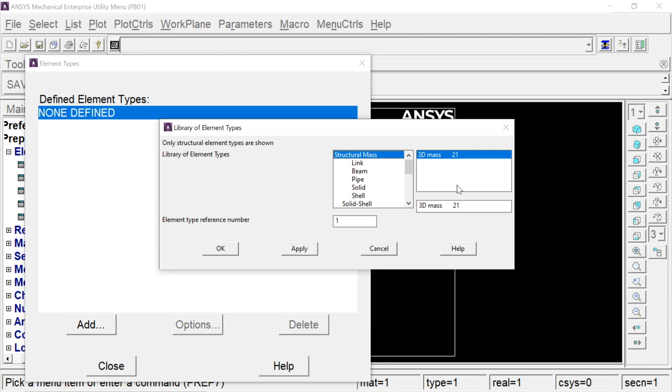So starting with preferences, this is also a structural problem. Then going to preprocessor, element type, add/edit/delete, add. We will take a link 180. Even though the properties of the element are changing, we will take only one element and we will change the properties. Don't add multiple elements unless it is necessary. You don't need a real constant.

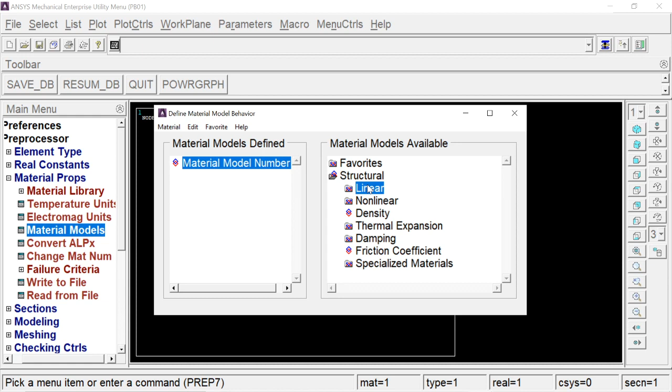We will go to material property, material models, structural, linear, elastic, isotropic, the normal steps which we do. We will just check the properties which we have. It's 2e5, so we will continue with that 2e5 and 0.3 Poisson's ratio. Even though it is not given, you can always put 0.3. Exit, because there is no change in material property, I will not go and add different materials.

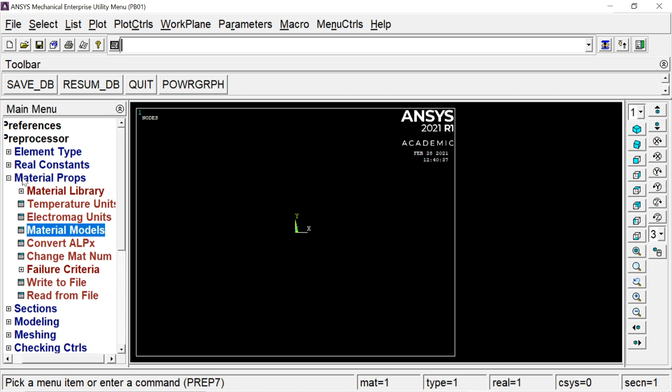Then we will go to sections, link, add. Now here you can see in the problem there are three different sections: one section at the start, a second section in the middle, and a third section. Link elements generally don't consider any shape, because it takes the axial load; it's the cross section area that matters, and here we need to find the cross section area. I have already found A1, A2 and A3. We will be inputting these cross section areas into our problem.

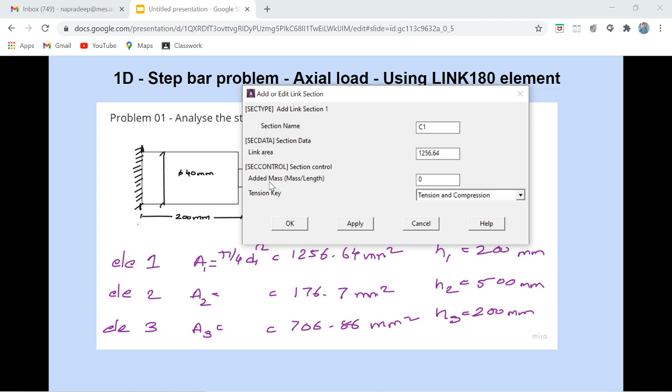So we will just go with ID 1, say okay, and section name, let's say C1, circle 1, and you can give the area, that is 1256.64. We will not enter any mass, tension and compression both, and you can say okay. Then we will add one more, ID 2 with a section name C2, and the area will be 176.7. So we will enter that, 176.7.

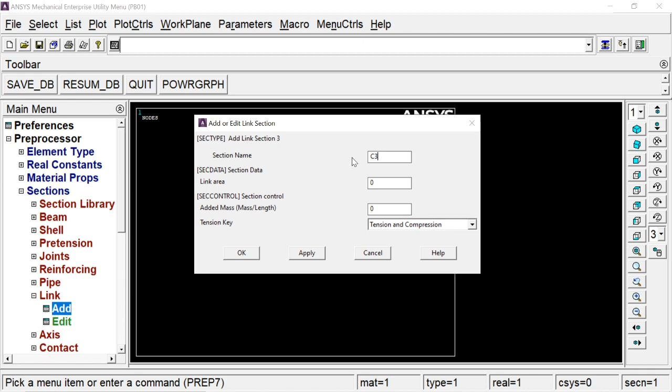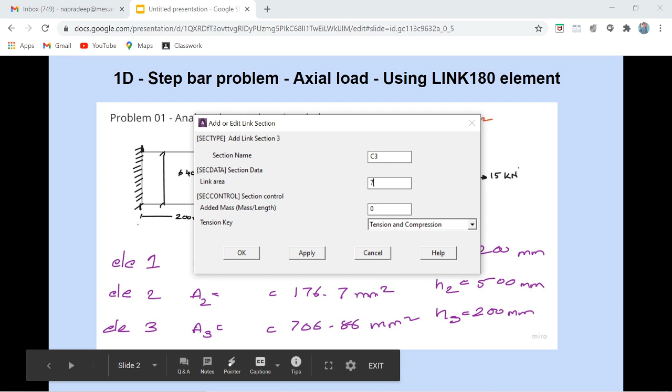We will add one more, that is area 3. Section name is C3 and area will be 706.86. Keep attention on units. If you are following mm, all the things you will be entering in Newton and mm metric units, basically following the same scale. So we will go to modeling, create key points in active coordinate system.

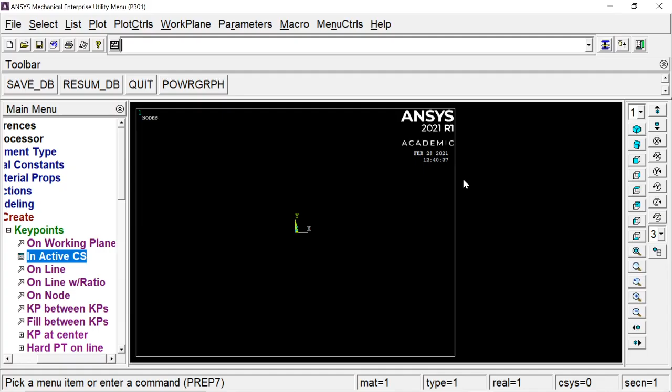Let us see what key points we need to make. We will take one key point at this end, so 200, then there is 500, so 700, and 900. Three key points we will be taking, and 0,0. So let us go and create. I will apply once, that is one key point. Then we will create at 200, apply. Then we will go for 700, apply. Then we will go for 900, apply, cancel. So I have four key points.

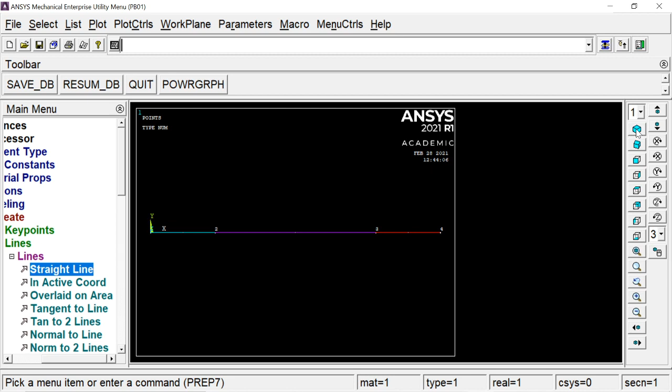I will just go and create lines for that. Straight line, one from here to here, here to here, here to here. Just click and you will get those lines. If you check in isometric plot, multiplot, you have three lines. Now after modeling we will go to meshing, and here is where we find most of the changes.

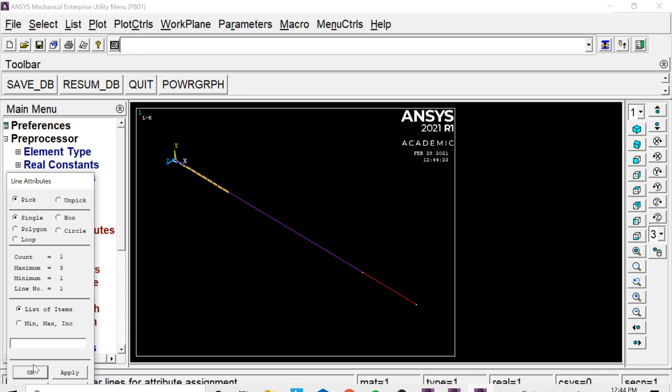So we discussed this in the previous video also: there are three important things which we need to understand, the element attributes, size control, and mesh. So we are changing element attributes here. Going to element attributes, set, the first line I am selecting, and for that first line I am taking link 1 and material number 1. We don't have any other material, but for cross sections we have 3 cross sections.

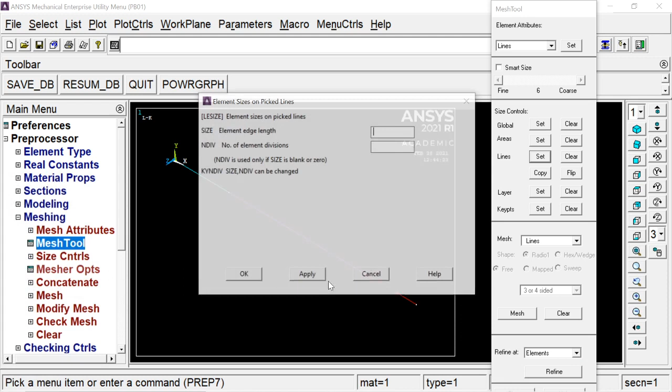So we will be changing basically these cross sections while meshing. So select C1 for now, say OK. Then you can go to set lines, select it, OK. Say I am going for 10 divisions for now and say OK. This is what the sizing will look like.

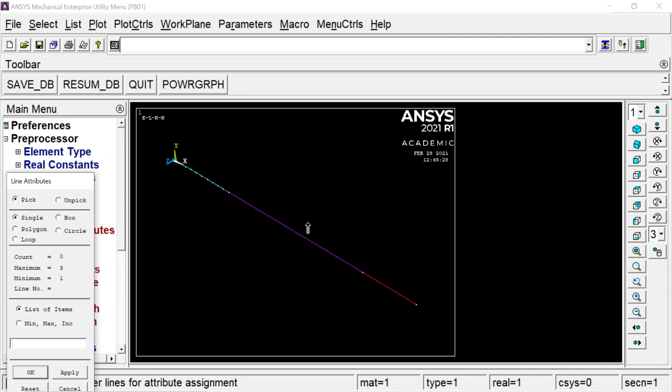You can go to mesh and this will be a mesh. Plot multiplot, that will give you the mesh of the first section. Now the second step change is in element attribute. You will go to lines again, and instead of first cross section you will go to the second cross section. Okay, and remember what are the different inputs you are giving to a cross section and your name, so that you will get the proper cross section wherever required.

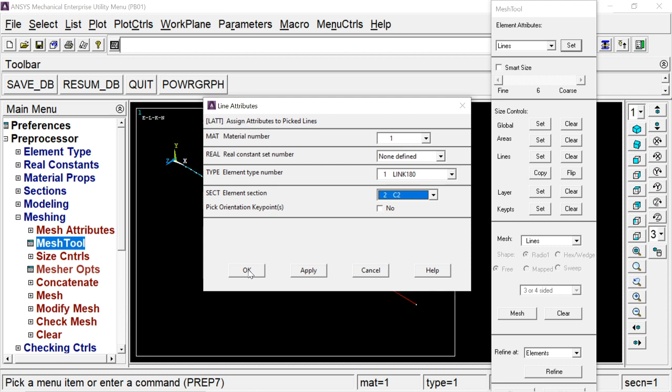Okay, now what we have to do here is second cross section. You can say okay, just set lines and say 10 divisions, and we will mesh it again. Okay, plot multiplot. I will show you in the second time itself how my sections are changing. I will switch on the size and shape, and you can see there is a change in cross section.

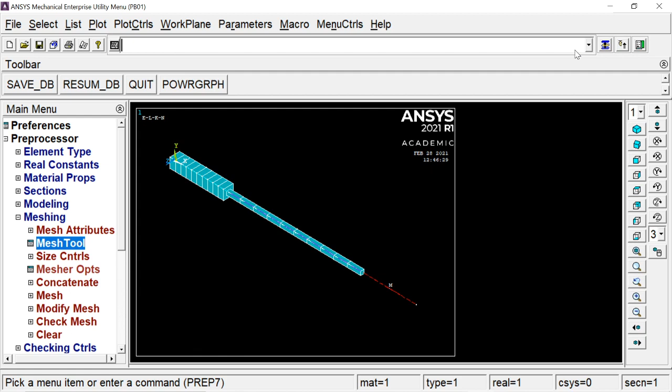Okay, now it's time for third line, so I'm selecting a third line here. Third cross section. Okay, you can just go and mesh. Oh, sorry, sizing. The second step, 10 sizing, and then you can mesh it. Okay, so this is how everything changes with the first cross section, second cross section, and third cross section. Now my body is completely meshed.

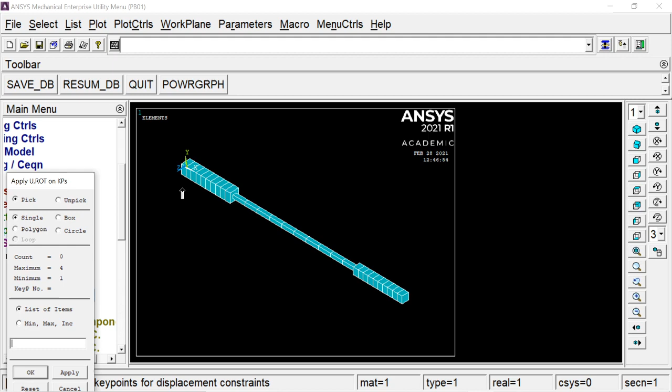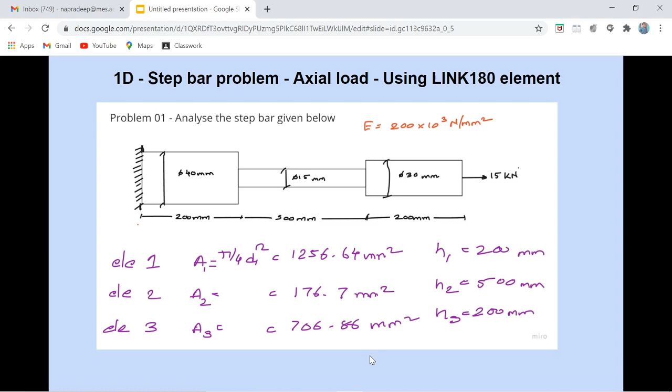I will go to loads, define loads, apply structural displacement on key points, select the key point. Okay, all degrees of freedom. Okay, and load, so I will go to force key point, select a key point. Okay, the force value is, again we need to check what is my force value. So it is 15 kilonewton, so we will be entering 15,000. Okay, and going towards right side, so it will be positive.

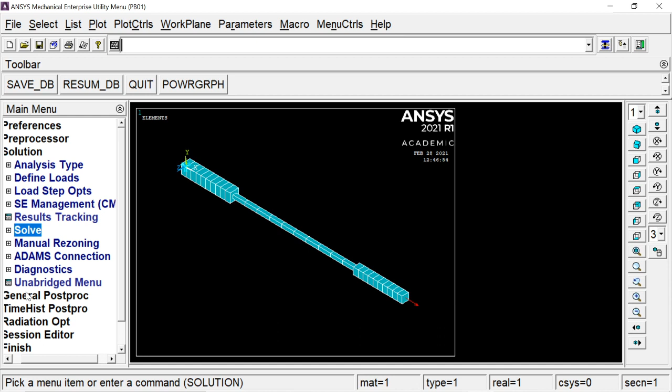So I will shift to my ANSYS window, we'll close this, and this is how you get the pre-processing done for a multi step bar problem. And then you can solve current LS. Okay, there will be a solution done. You can go to general postprocessor, plot results, deformed shape, nodal solution, DOF solution, X component. Okay, so you can animate and do all these things depending upon your requirement.

What we are interested in here is we need to find a stress, and if you go to plot result, contour plot, nodal solution, and you try to plot a stress, you will not get that stress in the element. Okay, you will not get that stress data for the link element. So how to plot the stress, that is the task. So you can go to element table, define table. Before that you can just go to the read result and say the last set. Okay, this is very important step.

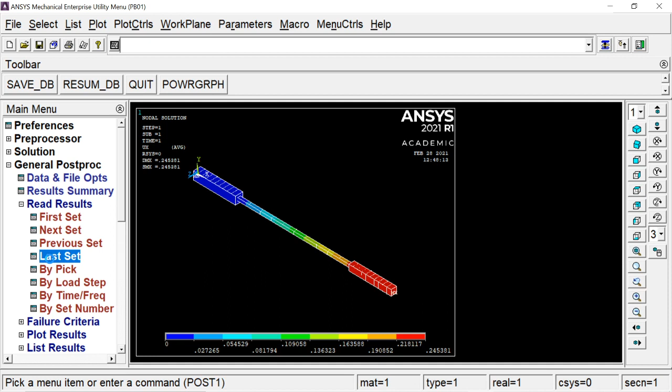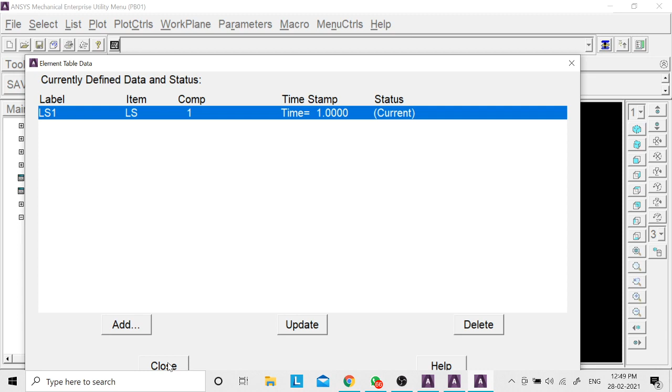When you go to the element table, read the last set, and then you can go to element table, define table, add. Element table window will open up, and in that you will go to last, that is by sequence number, LS, and 1. Okay, that will add one element table into your problem. Then you can go to list results, element solution, stress, X component. That will give you the element stress at each node and each element.

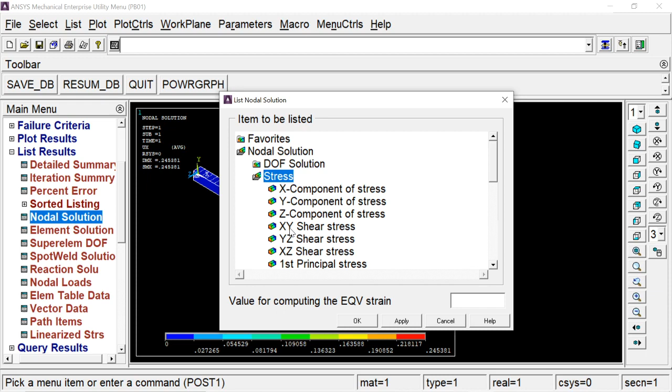Okay, same thing you can go with list results, nodal solution, and you can go with X component, stress in X component. That will give you the nodal solution of stress for each node, okay, maximum value and minimum value. Okay, so this is the tricky part which we need to understand, the stress calculation for LINK180 element. Okay, and that is what we have done in this video. So a step bar with axial load and a calculation of stress in ANSYS APDL.